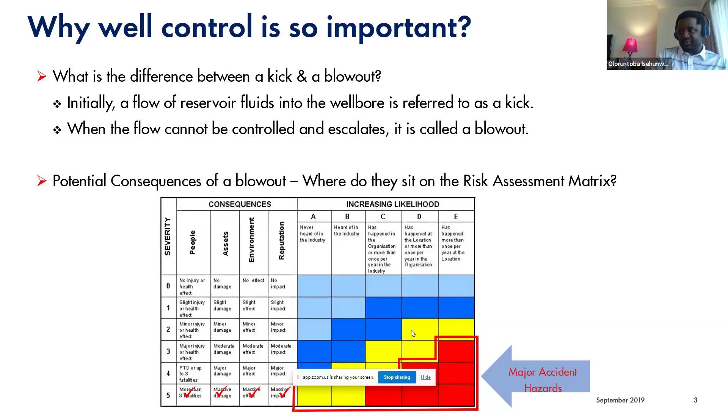So it's important in the industry that we understand, manage, and of course subsequently prevent well control incidents as best as we can. So this slide speaks to a couple of incidents that have happened, well control incidents that happened in the time past, and some have happened recently, even in Nigeria.

This does not speak to all; there are numerous. So you've had a couple of shallow gas incidents, both offshore and onshore. We had the Macondo incident in 2010, which is quite popular, especially for those who watched Deepwater Horizon. 11 people lost their lives, and BP spent over $60 billion in terms of fines and remediation.

And it cuts across different locations, land, shallow offshore, deep offshore, and different kinds of rigs, so semi-subs and even land rigs. All of them, if you look, a key recurring theme is the impact on lives, as well as the damage to assets and reputation.

So when you look at the impact, it's significant. We're talking about non-productive time, the cost incurred just to attempt to fix things, the disposal of hydrocarbons. All of a sudden, those hydrocarbons that you wanted to bring to surface in a controlled manner, you've lost control, and the environment is deeply affected, and of course damaged equipment, and a whole lot of other things.

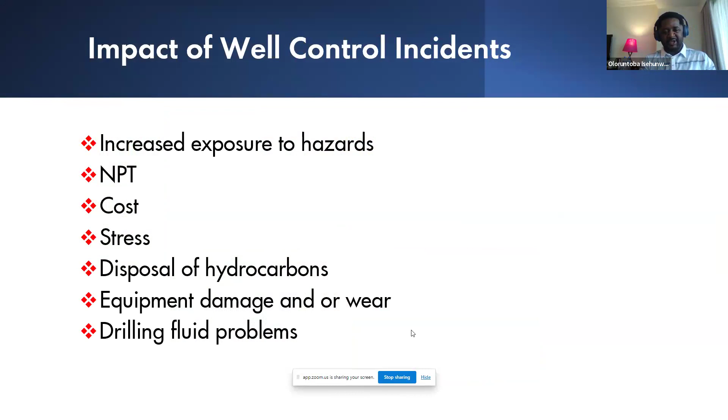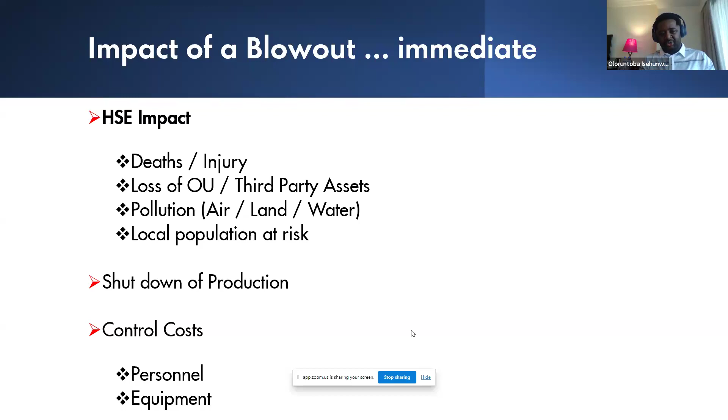So sometimes when we look at the well impact, we look at it in terms of the immediate: if you have a blowout, the immediate impact is deaths, injuries, pollution, shutdown of production, cost. Then you have a long-term impact as well: damage to the company's reputation, probably revoking of license to operate for the company involved, the huge remediation needed to manage environmental pollution, and deferment of production. Everything just shuts down basically.

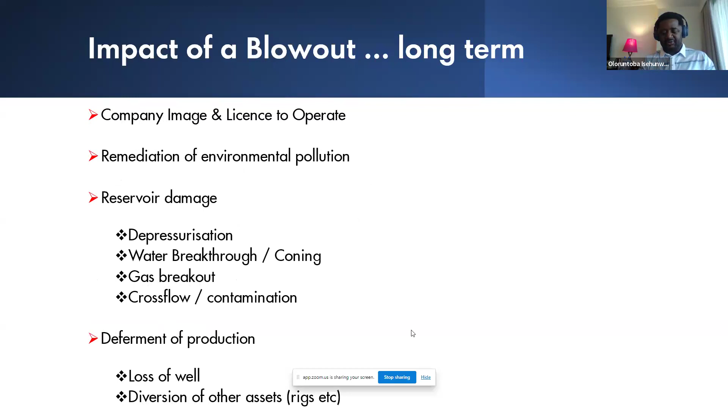Um, so it's quite significant, right? And it cuts across different spheres. So what I would like to do in terms of speaking about preventing well control incidents is to look at it from these four areas.

So I'm going to talk a bit about people. I'm going to mention something that we would call human factors. It's not quite popular in the industry, but I think it's very critical. Then I'll look at procedures, some of the principles, and then equipment. Like I said, because of time, what I will try to do as much as possible is to just touch on the key concepts. So, preventing well control incidents: for me, doing that, the first focus area has to do with people.

And this brings me to what we call human factors. Let me give a little bit of background. We have thousands, several thousands of flights that happen every day, all over the continent and all over the world.

One of the things that the IOGP, the International Association of Oil and Gas Producers, realized was that despite the number of passengers, if you look at just America alone, the millions of people that fly every day, there are so few incidents that have happened, even with the number of flights. And for us in the oil and gas industry, drilling well intervention, workover completions, the activity is not as much in terms of count as the aviation industry. Yet the aviation industry has been more or less pretty much safe in terms of their records. Maybe a couple of mishaps here and there, but not too significant.

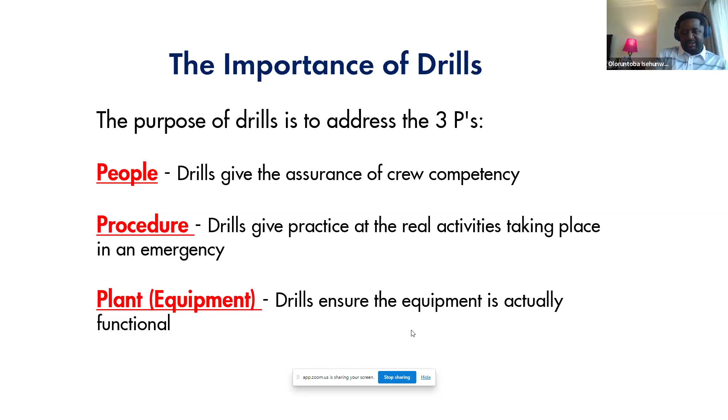Then the other bit is around drills. Drills are more or less preparing people - how do you manage changes, how do you manage situations? So the focus is usually on what I would call the 3 Ps: people, procedure, and plant or equipment, as the case may be. And what we tend to do on the rig side is to do drills as frequently as possible, as outlined in your work program. So you have a couple of drills around pit drills.

You're checking the response of the drillers and the crew to changes in volume. You have strip drills, choke drills, trip drills, a couple of drills. One of the things that is shown is that even when there's a well control incident, the extent or the volume, for example of kick you take, is significantly impacted by the response time of your team. How quickly does the crew shut in the well? That has an impact on the amount of influx volume that you pick up. So it's important that drills are done, getting the people, the crew, bring them up to speed, getting them adequately trained to respond to situations when or if they do happen.

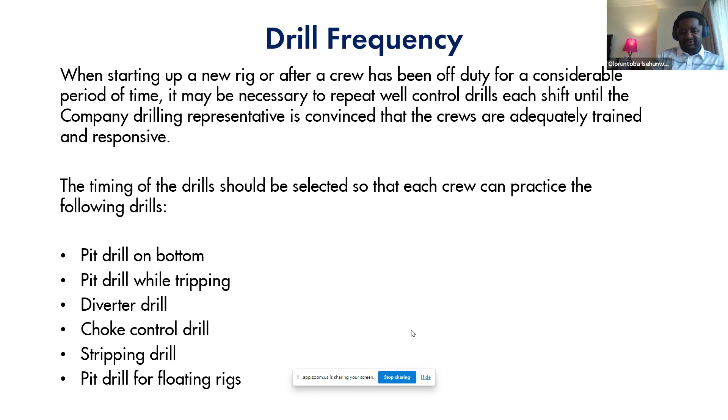Let's look a bit around the principles. There are key principles when it comes to well control. Understanding those principles is key, because if you understand them, then you can easily prevent well control incidents.

A key principle is what we usually call hydrostatic pressure. Liquids exert hydrostatic pressure, which is basically a function of density of the fluid and height, usually what we call the true vertical depth, or TVD. This is significant in terms of managing well control, and I'll show that later. Pressure and height, or depth, with regards to fluid, is huge. Your liquids exert hydrostatic pressures, and those pressures are a function of density and height.

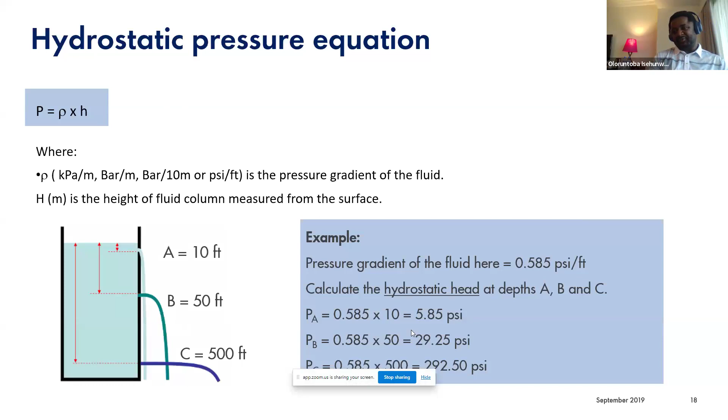This is important, and I'll share that later, because the foundation of well control is around maintaining primary well control when drilling. And that well control is driven by your fluid, by your drilling fluid.

Let me touch on another concept called barriers. This isn't usually spoken about too much, but it's important. Your barriers are basically any system or device that you use to confine or contain fluid or pressures within the confines of the well, which is what we basically want to do. So whether you're drilling, doing workover, well intervention, or completions, you want to release them in a controlled manner, through being mechanical or fluid barriers, but all barriers have certain requirements, and it's important that you verify those barriers.

Usually we talk about pressure testing to verify some of those barriers, weight testing, and some other things. But there are key requirements: fluid barriers, mechanical barriers. I always say that for me, no matter the well construction activity you're doing, understanding the concept of barriers is very key.

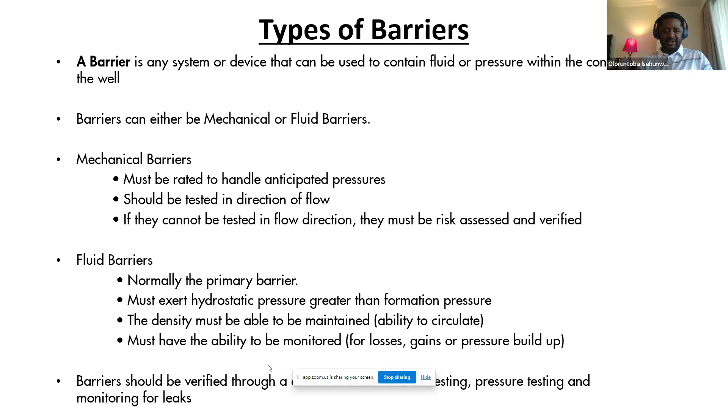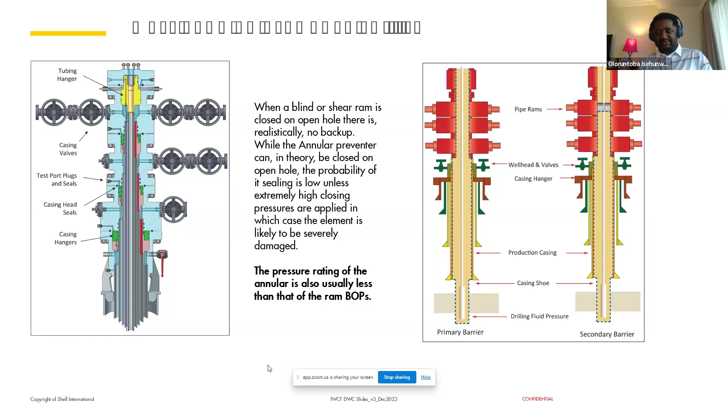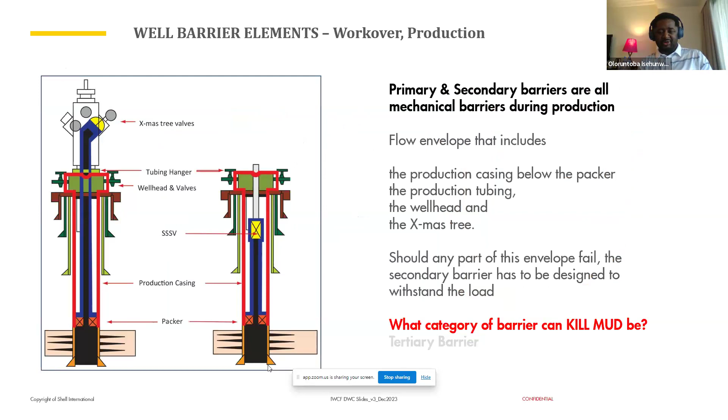If you look at this, for example, when you're drilling, you could have different barriers, primary and secondary barriers. Your secondary barrier is like the redundancy barrier, or the backup. And then if you're doing a workover production, you could have barriers around your packers, your production casing, your production tubing, the wellhead, the Christmas tree. But it's important that the barriers are in place, either when you're drilling, doing a workover, or doing production.

The next concept is around risk management, and I'm trying to build to somewhere. The principle or concept behind risk management is that there's something always called a hazard, anything that has the potential to cause harm. So if you have an object hanging at the top of something, that object can drop and kill someone. A threat is anything that releases that hazard.

And when that hazard is released, it leads to an event, what we call a top event. And if that top event is not properly managed, it could escalate in terms of consequence. One of the things important to highlight is that there are barriers in place for all of these things, up to even beyond top events.

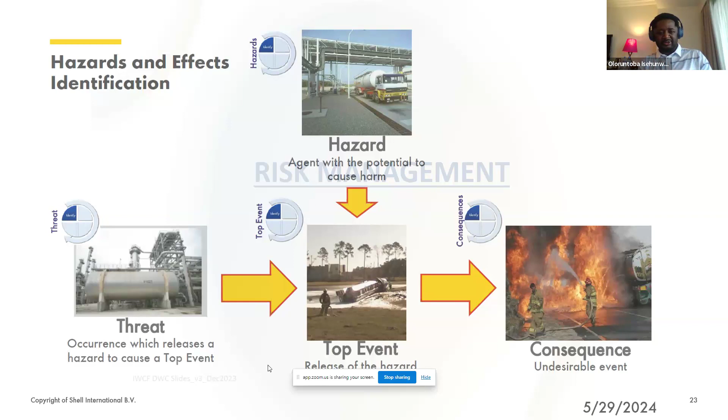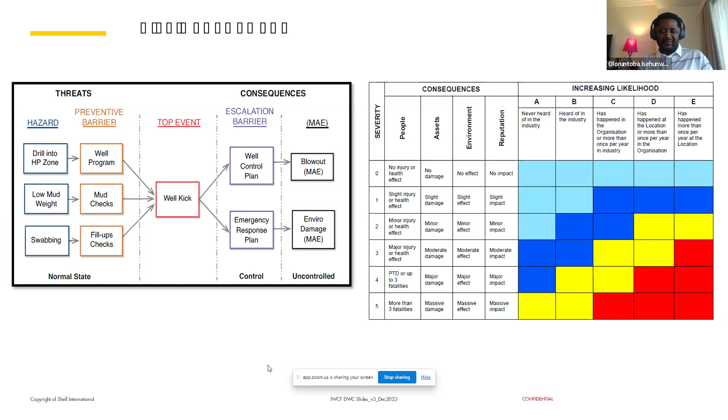So you have control barriers, you have mitigating barriers. Basically, how do I prevent my hydrocarbons from coming up to surface? You have your drilling mud acting as a primary barrier, and I'm going to show that shortly. The principle is that you have barriers to manage risk, either primary or secondary barriers, to help you drill safely and perform your work as required.

So what are the three levels of well control? With some of the concepts we've explained, there are three levels. You have the primary control, which is the first one. It's a prevention, it's like a preventive barrier. Remember I talked about barriers.

So you're in drilling, and I'm focusing more on drilling right now. Your drilling mud is your primary barrier. Remember, I said the concept of hydrostatic pressure is a function of density and height. So even if you have the mud of the required density, but the height is not full, or your hole is not full, then the hydrostatic pressure exerted by that mud is not as it should be. So if you want to say your drilling mud is a primary barrier, then the mud weight must be according to specification and your hole must be full.

And if for any reason you lose primary control, we have a secondary barrier or secondary control, and that has to do with your BOPs, your blowout preventers, your equipment. And if that fails, like in the Macondo incident, that escalates - remember I talked about consequences. So in that case, you need specialists, some of the Wild Well Control, to come and manage that. Basically, you are in a blowout scenario, and that's very difficult to manage.

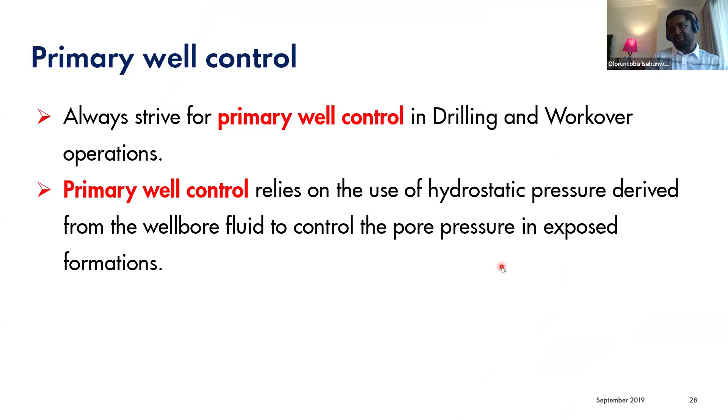So your primary well control, we always want to strive for that when it comes to drilling and workover operations, and it relies on the use of hydrostatic pressure exerted by your wellbore fluid to control the formation pore pressure down there. We can, however, lose that primary well control, and the concept is around two basic things. When the hydrostatic pressure exerted by that mud, that primary barrier, is not enough to overcome the formation pore pressure. So you are drilling through rocks with hydrocarbons. Those formations have their pore pressures, and if your primary barrier is no longer greater, then you have lost primary well control. And that could happen if, for example, the formation pore pressure is greater.

So when you drill through overpressured formations, typically this happens in exploration wells. Most times in that case, you have very little data. You are predicting pore pressures, and your predictions sometimes might not be spot on. But on development wells, developed over a period of time, you have enough PVT data, reservoir fluid, and all of that. You can predict the formation pore pressures.

The second bit is around cases that affect either the mud density. Remember, again, hydrostatic pressure is a function of density and height. So if you swab, if your fluid level falls or your fluid density drops - that's why sometimes when I'm on the rig I tell the mud engineer, make sure that your mud properties or mud weight is not diluted, your tanks are properly covered. It's because even if you have your mud full, but it's not the required density, then you've lost primary well control.

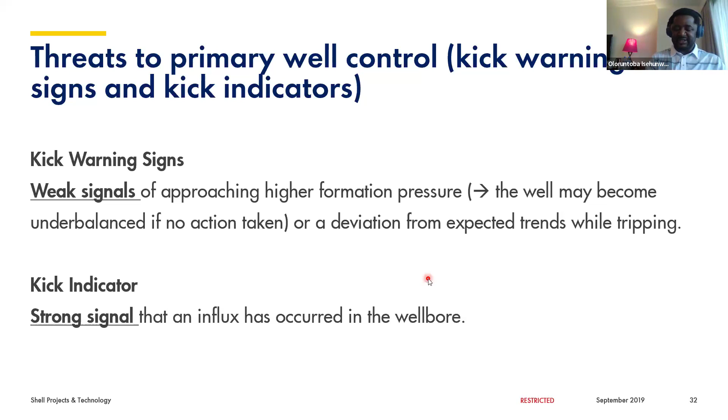Your kick warning signs are signals that there's trouble. You could have an increase in the rate of penetration, what we usually call a drilling break, change in cutting size - that's why the shaker man would always monitor the cuttings coming out - changes in mud properties, gas readings, and shale density decrease. So many factors.

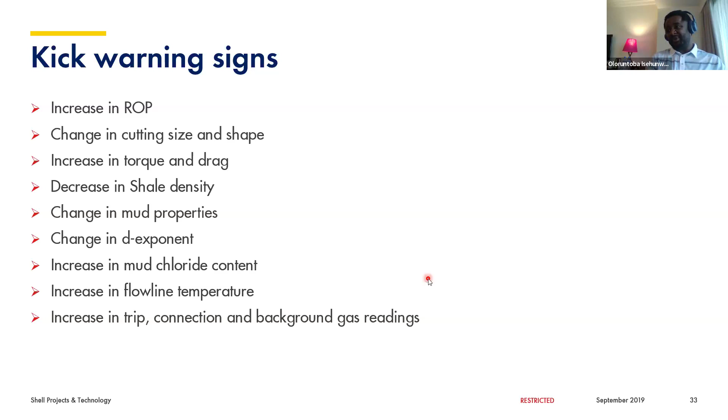All of these are warning signs. They are signs to tell you that something is likely about to happen, or you are drilling into a formation that is over pressured. You need to make some adjustment, right?

Whereas when your kick has come into the wellbore, when you have an influx, you have positive indications. So basically, in drilling, we have two return flow rates. That's the rate of return.

So something light has entered your wellbore, gas maybe for example, and the return flow rate has suddenly increased. The rate of return has increased, right? Or you have an increase in the pit levels, so the volume in your pit has increased. All of these are positive indicators, and you need to shut in the well.

So we have some devices. This is a kick detection device. It's a Flo-Sho - this is a paddle. This paddle measures the rate of return of flow. As fluid is banging it and passing through it in your flow line, it measures to say, okay, the rate of return is maybe about 40%. If there is an increase and suddenly something is gushing through it, this paddle moves faster, and then it tells you that hey, something is happening.

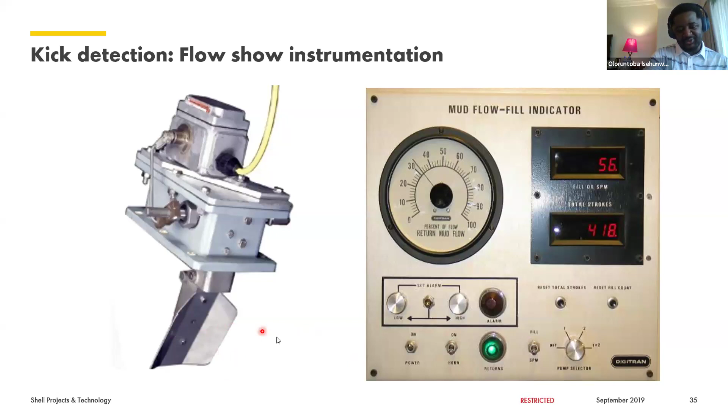There's fluid in there, and then of course you have your pit volume, which just measures the volume of your tank. That's what we call pit - your mud tanks, basically.

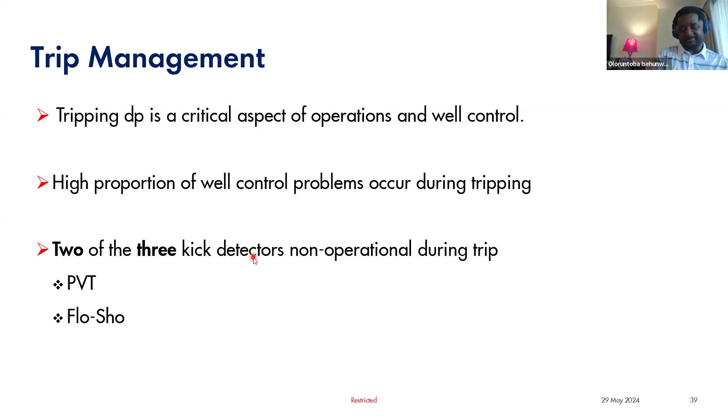The next concept is around trip management, and like I said, because a lot of incidents happen around human errors, it's important that we measure - we have a system to manage our tripping. Tripping is when you're running in and pulling out your pipes, your drill pipes in hole, right?

And we have a trip tank basically that helps us do that. The trip tank is just a small volume tank that helps you take a significant measurement of change in volume when you're running a pipe.

Unfortunately, I can't make so much of an illustration, but I always illustrate this by saying if you pick a bottle of water and you dip maybe a pen inside - Archimedes principle, right? When you dip that pen, the height of that water will increase, because what you're dipping is displacing a volume that should be coming out and should be going back inside your trip tank. So you need to have a way of measuring it, and the reason is because your hydrostatic pressure is a function of the height of your fluid. So you need to make sure that your hole is full at every point in time.

So let me speak around some procedures. You have situations where suddenly, for any reason, your primary well control is lost, and then your secondary well control is you need to kick start that - you need to shut in the well. If you have an influx, you have a well control incident while drilling.

Typically, we have maybe soft shut-in and hard shut-in. The hard shut-in is usually preferred because it's faster.

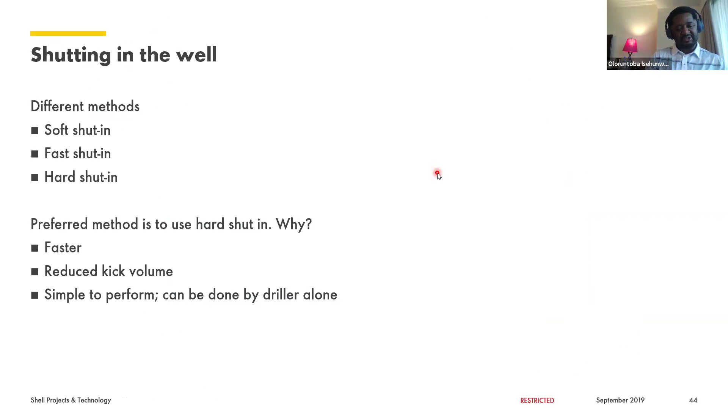Basically, what you're saying is there is something that is closed - you have a choke that is closed, and then your BOPs are closed before this remote control HCR valve is open, right? So that's your hard shut-in, basically.

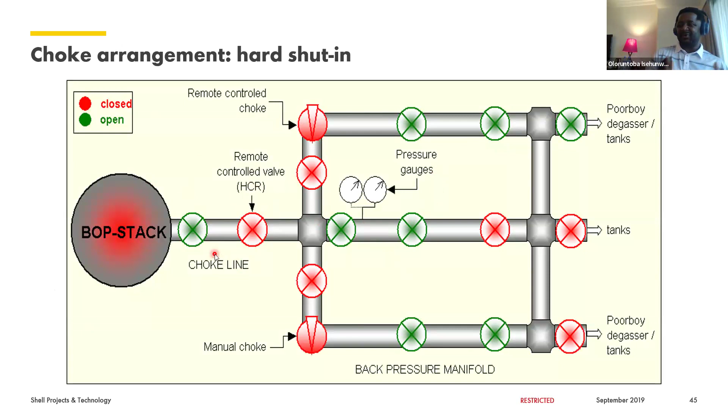I'm going to speak a bit around this, but let me just quickly move, right? So there are principles around your hard shut-in. Shutting is just saying I have an influx, I need to shut in my well, I need to close, and more or less isolate the wellbore.

So you have a couple of equipment where your primary control has failed, you rely on a couple of well control equipment. The basic one, the secondary one, is your blowout preventer. And here at the top, you have what you call - if you see the spherical bag shape - your annular preventer. You have a couple of blind shear rams.

In this case, your blind shear ram will cut the pipe and seal the wellbore. And you have your pipe rams. Your pipe rams basically cut or close across a specific size of pipe. So if you have a pipe that the outer diameter is 5 inch, your pipe rams will close around that 5 inch pipe.

You have some other kind of rams called variable bore rams. Those close around a range of sizes of pipes, so you can have maybe 4 inch to 7 inch. Your variable bore ram will close around any pipe within that specified range, but your pipe rams will close around a specific size of pipe.

So in this case, you're drilling, your mud has failed, and you activate your secondary barriers. You can close your annular or close your pipe rams and seal the wellbore.

When you want to begin to regain control, you have a couple of things that you use. The choke manifold is just a collection of valves that helps you remove that unwanted visitor we call an influx out of the well safely. You want that visitor to leave, but in a controlled manner, minimizing any subsequent damage. The choke manifold helps you do that, using a choke panel to control the choke valve. Then you have your accumulator unit, a collection of bottles that provides the hydraulic energy needed to activate these preventers.

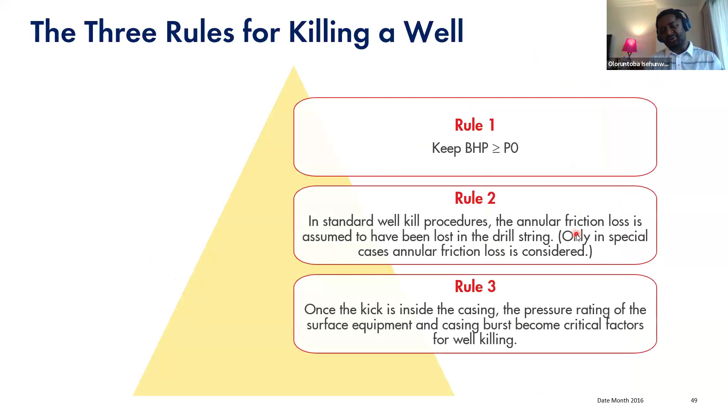So if you're closing the well, shutting the well, you want to regain control, you want to kill the well. I'm not going to speak too much about this because of time, but there are different methods. The one used worldwide is the driller's method, which is basically two circulations: bring out the influx in the first circulation, then the second is pumping.

You want to pump in a drilling fluid that has greater weight than the formation pore pressure, what we call the kill mud. That's the driller's method, two circulations: wait and weight is one circulation. You wait, and then you weigh up that drilling fluid to make it heavier than what you would expect downhole. Remember, hydrostatic pressure is a function of density of the mud and the height.

Concurrent circulation can happen at a couple of times. You have reverse circulation, typically used in workover operations where you're already producing and you circulate out, circulating in through your annulus and out through your drill string. And bullheading, which is usually not liked by subsurface people because you are injecting or forcing all of that fluid back into the formation.

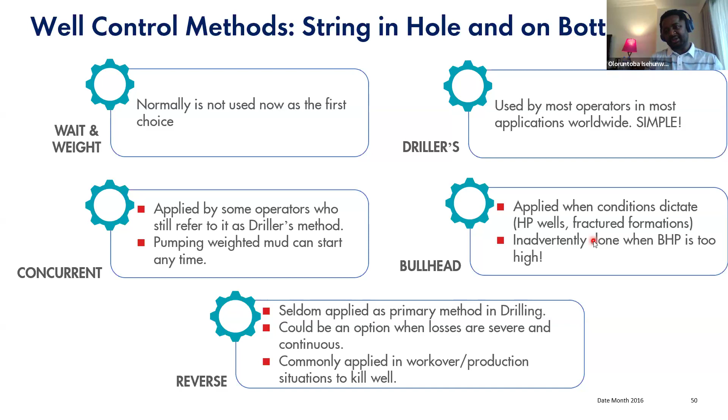So, because of time, this is just an overview of preventing well control incidents. To recap, remember I said looking at it from four areas of focus or four lenses: people, right, competent people, properly trained, understanding the concepts behind human factors, which is around communication, leadership, teamwork, situational awareness, and drills, testing and preparing them in case an incident happens.

Then you have the key principles: do not forget the hydrostatic pressures, the function of density and height, barriers, managing your risk, primary control and trip management. Then equipment, which is like the secondary barrier: your blowout preventers, your choke manifold and chokes, your MGS and your accumulator unit, and then of course the procedures.

When you've had an influx, how do I shut in the well? I shut in the well, I close my BOP, I line up, and I'm ready to kill the well. What are my well control methods? How do I regain control or kill, you know, what has come into the wellbore?

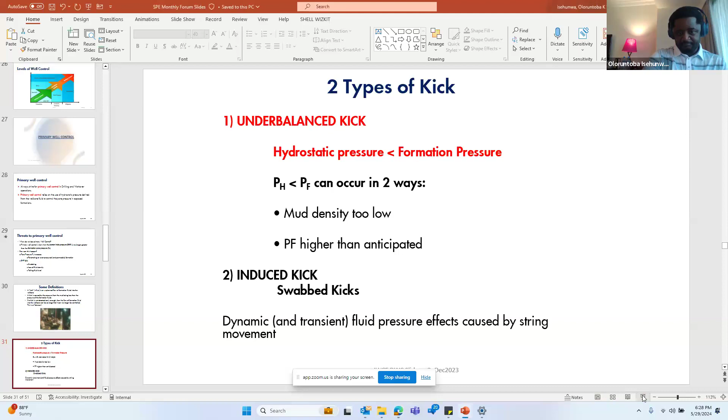Okay, so how does influx come in? Confirm you can hear me, Israel. Yes, go ahead sir. So I tried to explain it before.

There are two key players. You have your primary barrier, which is your drilling mud, and that mud exerts a pressure. The pressure is a function of density and height of the mud. And then the second player is your formation pore pressure. So when the hydrostatic pressure exerted by the mud becomes less than the formation pore pressure, you will take an influx, meaning you've lost primary control. That can happen if your formation pressure is unexpectedly greater than the mud hydrostatic pressure, because you are drilling an exploration well and the pore pressure you predicted was not accurate - it's a prediction, and it happens a lot of times. But the second case is if that mud hydrostatic pressure reduces, either because your density reduced by dilution, or your hole was not full - we talked about trip management. The hydrostatic pressure is a function of density and height, so if that height drops, either because of swabbing, or you do not fill your hole properly, or your mud density has dropped, then you will lose primary control and have an influx into your wellbore.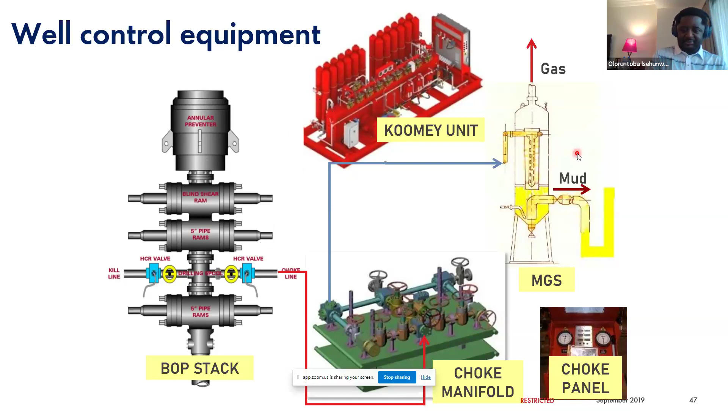On swabbing. Swabbing is an instance where you could lose the effect of your hydrostatic pressure of your mud. Typically there are two types: the high volume swabbing and what we call the low volume swabbing.

So that's the high volume swabbing. Low volume swabbing is when you're pulling too fast. Remember I tried to explain Archimedes' principle - the principle behind your trip tank is that when you pull out of hole, you need to fill back the space or vacuum created because you pulled out pipes.

So as you're pulling out pipes, your trip tank is helping you fill up the hole because you need to keep your hole full at all times. If you pull too fast, you're not going to be filling as fast as you're pulling, and that height level will drop.

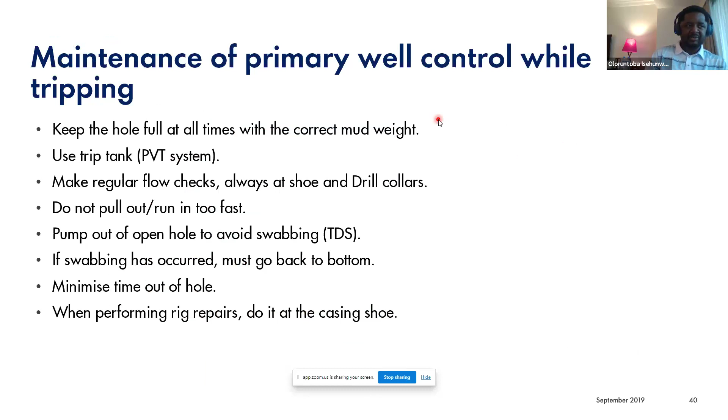To control hydrostatic pressure - and that's why I talked about the concept of hydrostatic pressure - you control mud density and you control height. Hydrostatic pressure is a function of density and height. Make sure your mud density is up to spec.

You have your mud balance on site. The mud engineer or mud man is checking mud weight in, mud weight out, say 10 ppg. You want that mud weight to be on spec. For the height, there's your trip tank, which I talked about, and your tripping sheet.

If I'm pulling out one joint of pipe or a stand of pipe, I need to be filling back the hole. So you're measuring that volume displacement, because you want to keep your height filled up. That's the basic principle behind hydrostatic pressure, if you can keep the drilling fluid mud weight high.

Then there's dilution of the drilling fluid. I've seen some rigs where, when it's raining, water enters the tanks where the mud is, and your mud gets diluted. Once it gets diluted, the hydrostatic pressure is reduced. So that's basically around maintaining hydrostatic pressure.

The next question: school textbooks talk about primary and secondary well control, but today I'm hearing of tertiary control for the first time. Can you tell us more? Maybe just talk about it briefly because of our time.

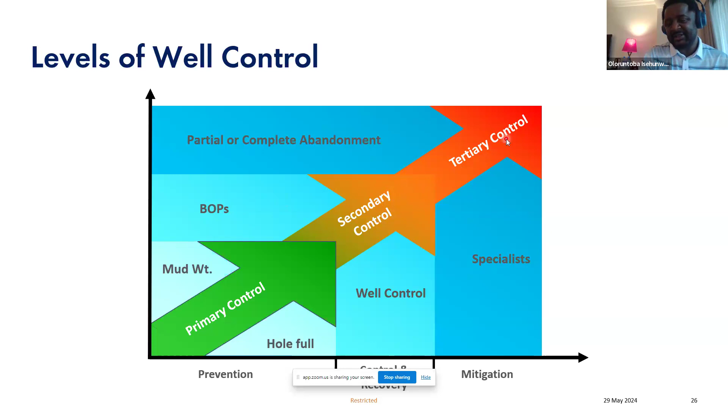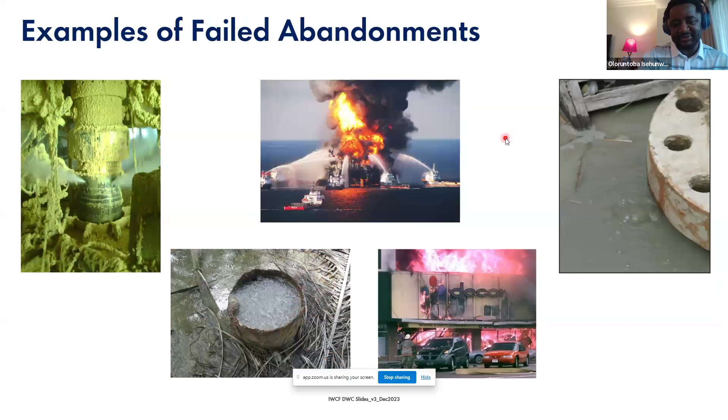Remember when I shared some pictures of well control incidents. In this case, most times your rig is burning, nobody's going to go in there and start pumping anything. So you go to a different location and do directional drilling to intersect those hydrocarbons and pump. They always tell you that if you want to quench a fire, go to the source of the fire, for example, if it's electrical, switch off and address the source. So that's what you want to do, but you can't go there now. You have to go through a different well, do directional drilling, go under, and intersect.

In that case you need specialists, and there are not very many in the world. You have some people called the boots and coots, or wild well specialists. That's tertiary control. Most times you have to look at the risk very well, weigh it, is it worth it, and all of that. So that's tertiary control: your preventers, secondary control has failed, and you have a blowout, and now you're just trying to do your best to manage it again.

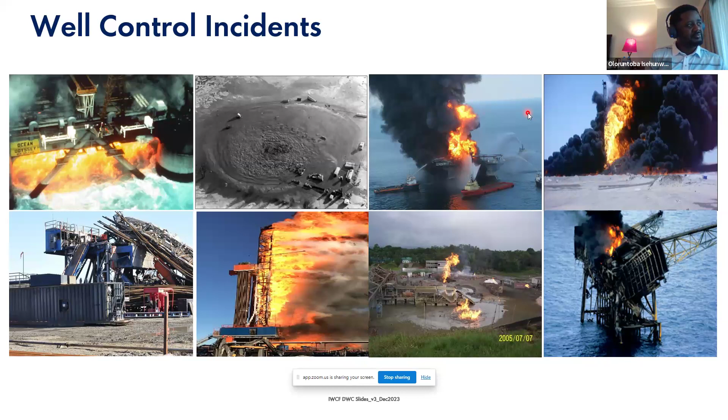Thank you, sir. Mr. Lotana Wadiki is asking, can employee competency level be classified under human errors?

Yeah, and that's why I actually started with that, in terms of people with that focus area. Let me say this, competence has shifted from just training. Everybody can read and pass, and that's why I talked about the simulation aspect, the behavioral aspect, the human factors principle, which we use our simulation center, for example, to do. Where you bring people, you bring the rig supervisor, this person is saying do this, that person is saying do this, the AD, blah blah blah, how do they communicate, how do they work as a team? So it's beyond just having the paper now.

We're now incorporating, IOGP has recommendations now concerning human factors, incorporating understanding the behavior of humans, how do they work together. So all of that ties into competence, yes. And like you rightly said, this is a key focus area.

This is the last question I'm seeing here, from Uche Ozigwe. He says, during underbalanced drilling, how do you keep the well under control?

Underbalanced drilling is a different concept. Usually we use that where you have what we call tight reservoirs, where permeability is not good enough. So in normal conventional drilling, you're saying I don't want the hydrocarbons to come up to me, but in this case, the hydrocarbons themselves cannot really flow in. So what you want to do is go underbalanced. You're not worried because you're not going to get much. You can't try underbalanced drilling in the Niger Delta region, where most of the reservoirs have very good permeability and they will just come in on you.

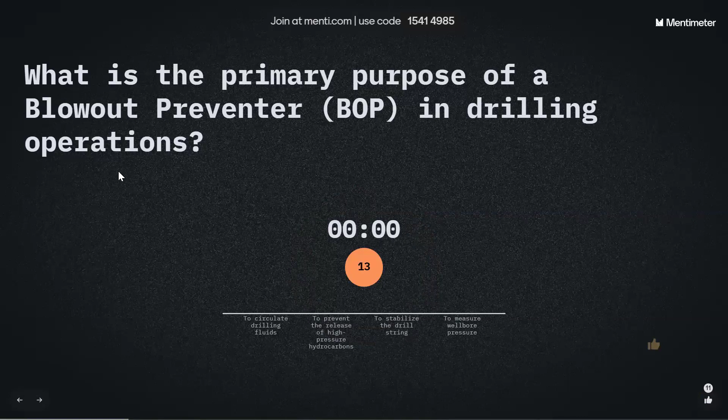What is the primary purpose of a BOP in drilling operations? All right, so we have 13 correct answers.

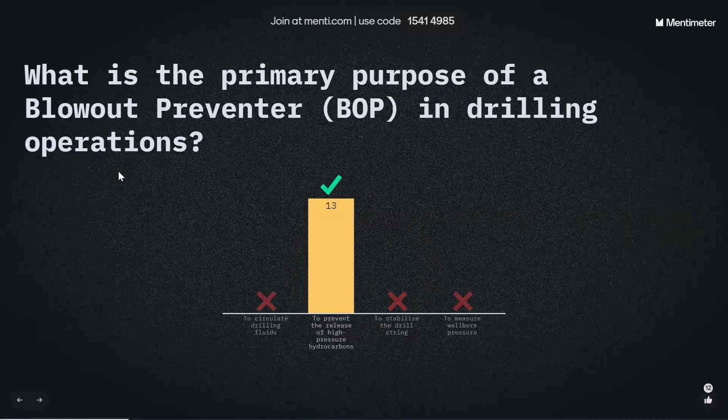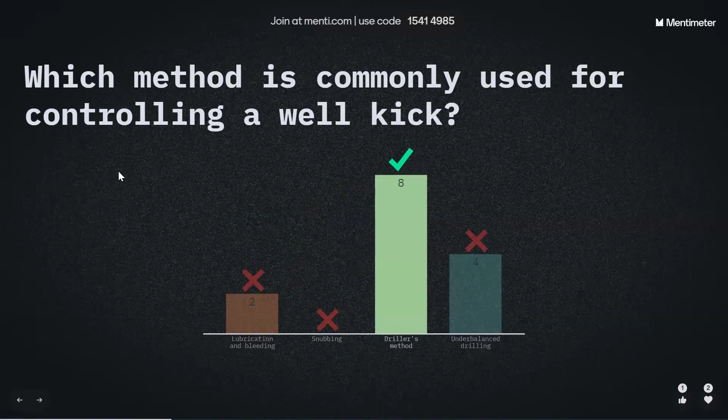Question 2, 14 players, let's go. Which method is commonly used for controlling a well kick? I remember very well the speaker mentioned it. All right, we have 8 correct answers. The driller's method.

Question number 3, we have 15 players ready, let's go. In well control, what does the term secondary control refer to? I know the BOP is somehow tricky, but remember, after the primary barrier fails, you automatically enter secondary, and the BOP is probably not the only mechanism for secondary control. The speaker mentioned something like pipe rams for cutting the pipe based on sizes, so please let's take note of that. We have 5 correct answers.

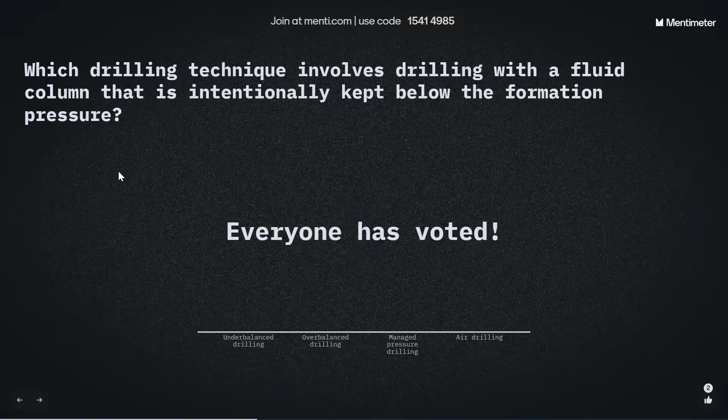Question number 4, 16 players are ready, let's go. Which drilling technique involves drilling with a fluid column that is intentionally kept below the formation pressure? We have 12 correct answers. It seems like everything on this quiz was discussed in today's class.

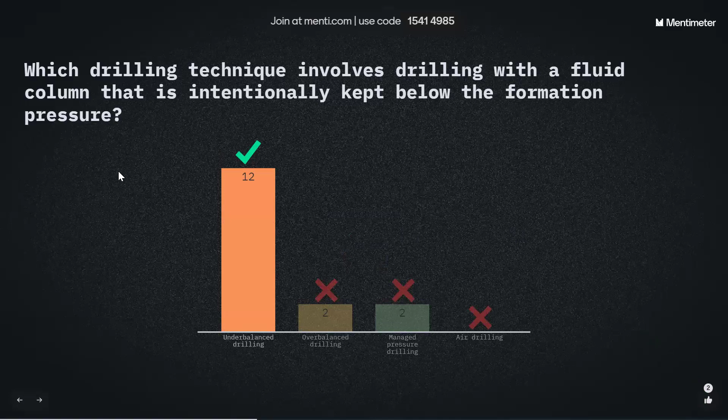So let's see who is leading. Atiga Efyong Ayo is leading with 3,331 points, good job. And Power has come close with 3,306 points. Let's see how it goes in the next round. Question number 5, 16 players ready, we'll go into a little bit of drilling now.

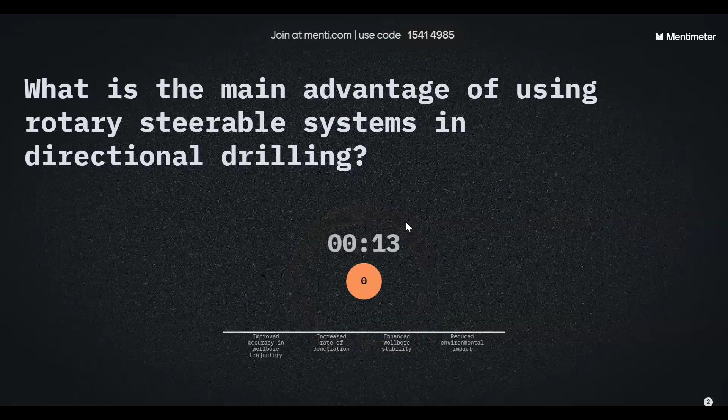Drilling... rotary steerable systems, directional drilling. Correct, improved accuracy in wellbore trajectory. I remember the speaker said in tertiary well control, maybe after a blowout, you might need to drill a relief well directionally, which requires specialists, and there are not a lot in the world. It requires improved accuracy in wellbore trajectory, so probably they also use rotary steerable systems while carrying out that job. Let's take notes.

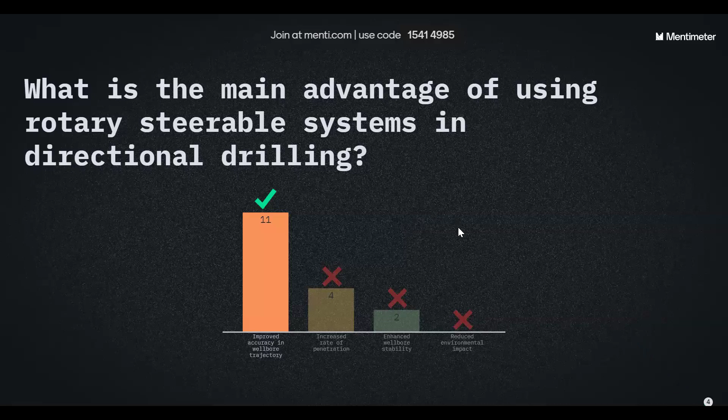Question number 6, we have 16 players. All right, what is the purpose of a gravel pack in well completions?

All right, we have 8 correct answers. Question number 7. We are in the second phase of the quiz now. We've answered the first 6 questions. 17 players, wow, increasing. Okay, let's go.

In completion operations, what is a packer? What is a packer in completions? Fifteen correct answers. Nice. Guess everyone knows this one.

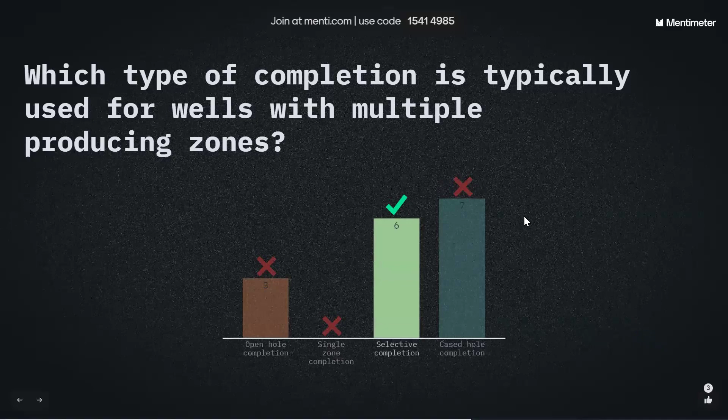Question number 8. Which type of completion is typically used for wells with multiple producing zones? Selective completion. Okay, so let's see who is leading.

We are about to enter the final lap. Let's see if Atiga has retained her position or his position. Power has taken over. I saw that coming. He was actually the fastest in the previous round. Okay, so the final lap. Let's see if the winner will retain his position or there will be an overtaking.

All right, so for question number 9, we have 15 players ready. Let's go, 16 players ready. Some current affairs, maybe. Which topic was a major focus at the most recent SPE ATCE? SPE current affairs. CCST, carbon capture and storage technologies.

Okay, 5 correct answers. Question number 10, 17 players ready. Which recent technology highlighted by SPE aims to improve well integrity monitoring?

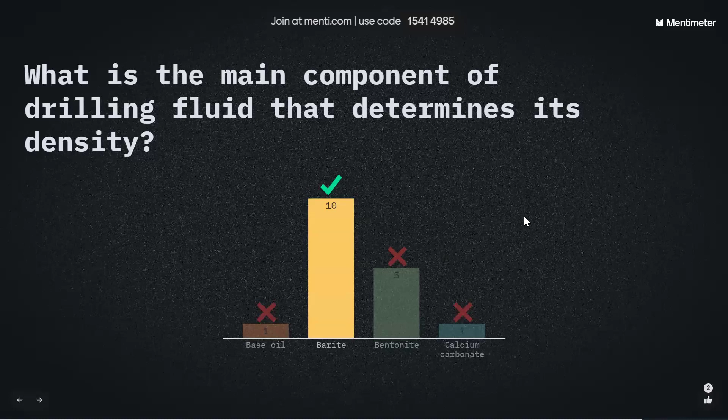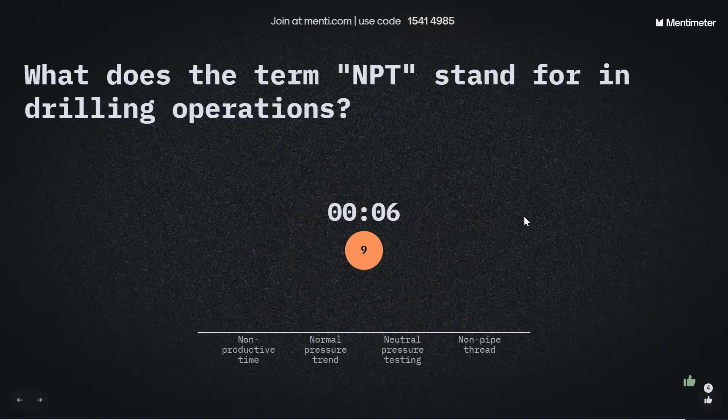Correct answer. Now, the last question for today, 17 players. Let's go. What does the term NPT stand for in drilling operations? NPT, drilling operations. Non-productive time. 14 correct answers.

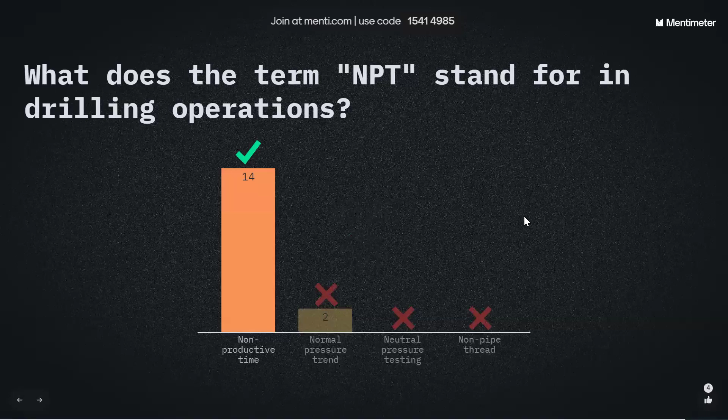Thank you very much, guys. So let's look at our leaderboard and see if there are any changes. Wow. Wow. I like this. So Atiha Effiong Eyo, leader in the first round, got a little setback and has come back to claim his position.